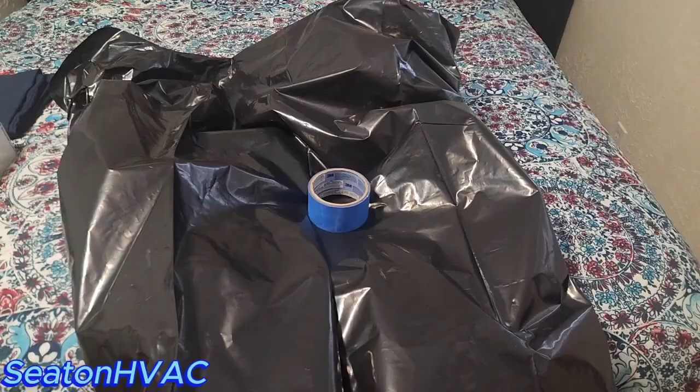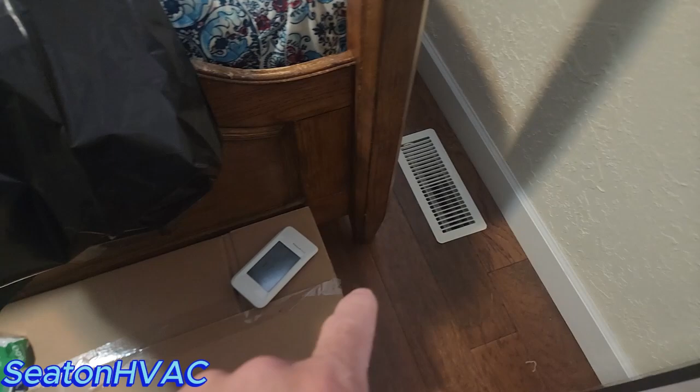Hey guys, I told you I was going to do the plastic bag trick, so here you go. Okay guys, I told you I was going to do this, so I got my 32-gallon bag, I got my tape, and I got my controller so I can turn the fan on. So let's check this out. Let's see how it works.

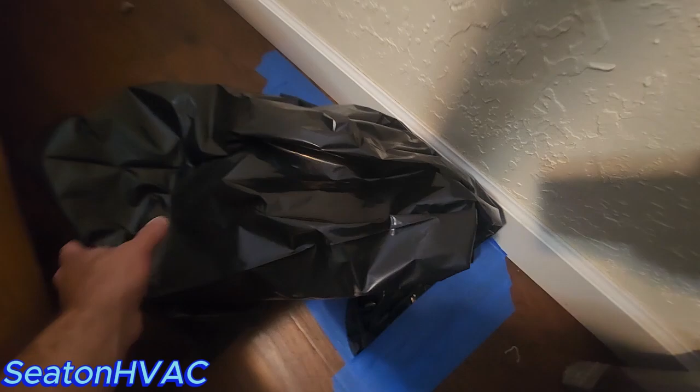Okay guys, so my wife says I'm a little weird, and she's probably right. So what I did was I took my 32-gallon construction cleanup bag, and I went ahead and blue taped him. I got a gap there. I'll fill that in before we do the video. I got the fan off. I'm going to tape this up a little bit better.

So it's a 32-gallon bag. I figure I'm probably losing a gallon because I got a little bit of it taped down. Let's call it 30 gallons just for the sake of this video. And I'm going to get my stopwatch on my phone going, and let's see how fast she fills up.

I wish I had another camera, but my little GoPro kind of sucks. I don't really like it, so I'll have to get the stopwatch off camera, but I'm going to tape this up a little better. I'm going to turn the cooling on to this zone by itself, so it's full speed, and I'm going to time how long it takes to fill this bag up.

I'll be back. Alright guys, I've taped it up better so it's good. Let's do this. I'm just going to count it out. I can watch the timer on my video timer here on the phone. So, you know, I won't get fractions or anything, but let's just get full seconds. Let's see if this works. So I'm going to go ahead. I got my controller here.

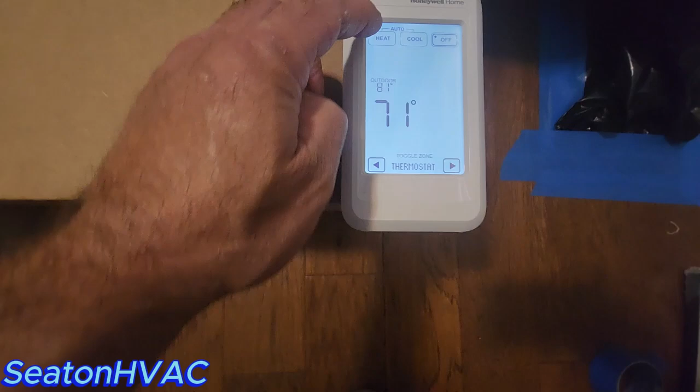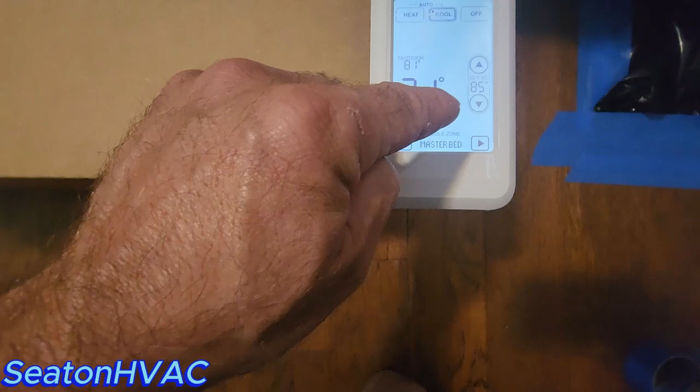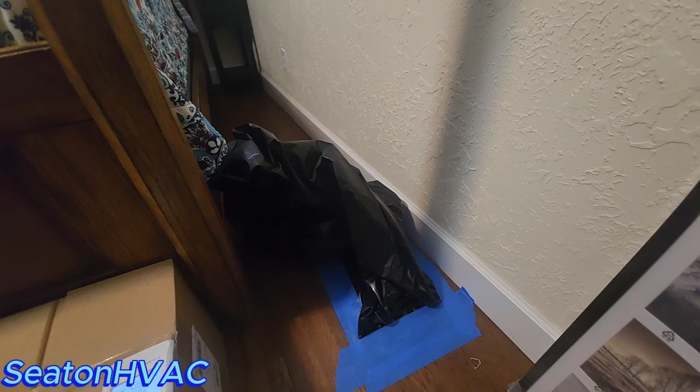Let's see, master bed. Okay, that's this zone. And let's do cool, and let's turn it down, and let's wait for it to come on, and we'll time it. So should be clicking any second. We'll watch the bag fill up. Might have to wait for the delay. Yeah, it's probably going to be a few minute delay because it's got those stupid Vision Pros.

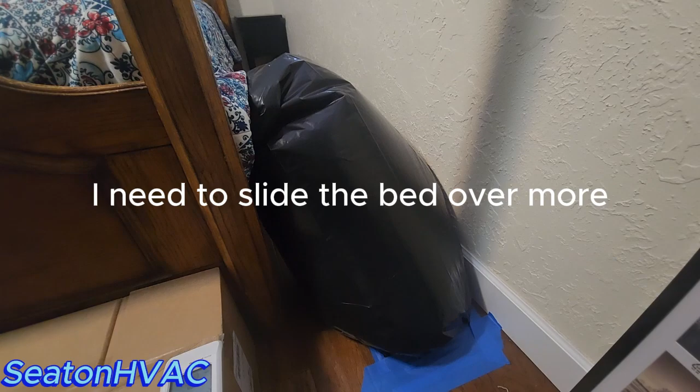I could go down and put it on test mode, but... Alright, hold on. Oh, there it goes. Okay, 1, 2, 3, 4, 5, 6. Okay, it's... wait, 6. Okay guys, we're fully inflated. So what I'm going to do is, let's redo this again. I think it was about 7 or 8 seconds, so let's do this again. This is kind of fun.

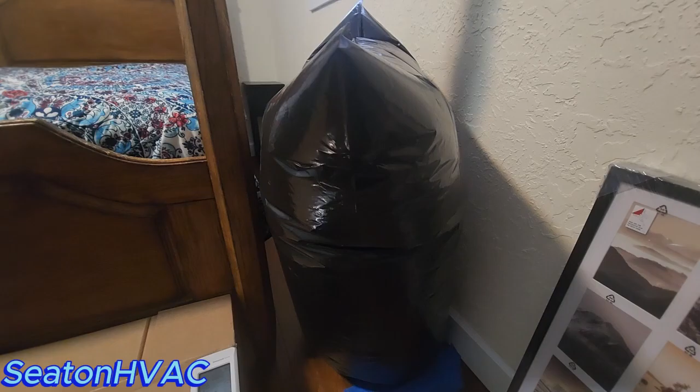Okay guys, we're just waiting for the delays to stop and the system to kick off, and then I'll kick it back on. It's doing its post-purge. But what I'm going to do this time is make sure the bag doesn't get caught on the bed. That's what happened, so it didn't fully inflate. Like, see how it's all pushed up now? And we'll get a real reading on it.

That's kind of cool. It's been probably 25 years since I did this. An old school tech taught me this a long time ago. He didn't want to buy a Flowhood, and it actually worked. We could dial stuff in pretty good, and the customers were happy. So let's wait for it to shut off, wait for the bag to deflate, and we'll do it again.

Okay guys, we're back for this weirdness. So the bag is fully deflated. I let all the air out. I just popped some of the tape and pushed the air out. What I forgot is this is on the zone panel, so it's got that post-purge. I could run out and make it stop, but we're good now. Let's put the cooling back on.

I'm gonna try to pull these flaps up as it goes so it doesn't hit anything, and then we'll count how long it takes the bag to open. So let's do this. Let's go back to cool, and she's on 65, so it'll take her a second to come on, and see what we get. Kind of looks like Yoda right now.

All right, and I'll count. So I'll count where my camera's on as far as seconds, so I can see the counter in front of me. Then we'll do the math. I'll show you the math out on the whiteboard. There we go. 1, 2, 3, 4, 5, 6. Okay. Okay, guys, that was almost 6 seconds on the dot.

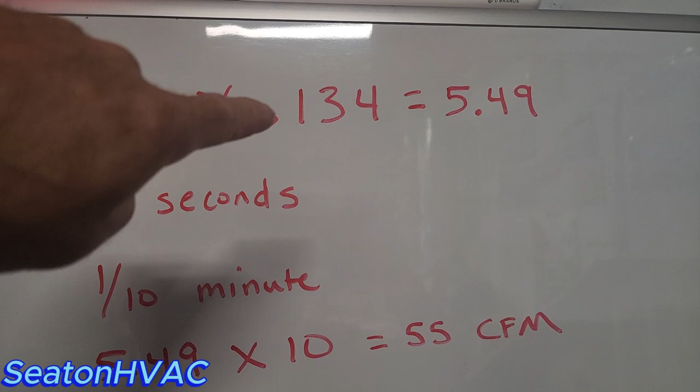All right, guys, we're over to the whiteboard here. So let's do the math here. So I said it wrong. It's not a 32-gallon trash bag. It's a 42-gallon. Let's say we lost a gallon just by taping it down, and maybe that is the full 42. Whatever. This is fun to do. So, 1 gallon equals... sorry, 1 gallon is 0.134 cubic feet.

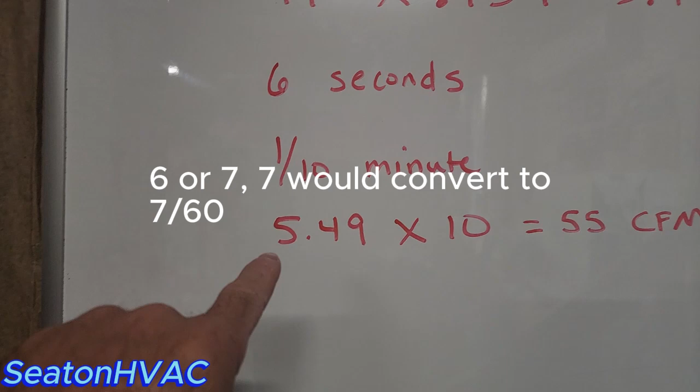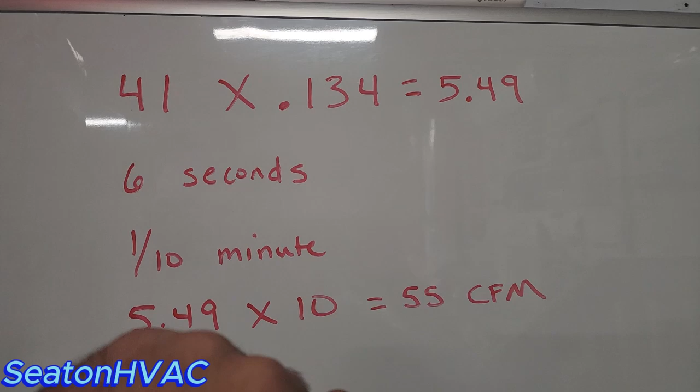Okay. So let's say 41 gallons equals 5.49 cubic feet. We filled that bag up in 6 seconds. That's 1/10 of a minute, okay? So what we're going to do is times that 5.49 times 10, and that gives us our 55 CFM, 54.9 CFM. And that's pretty good. That's about what that room needs. It's a small room. But it's pretty cool.

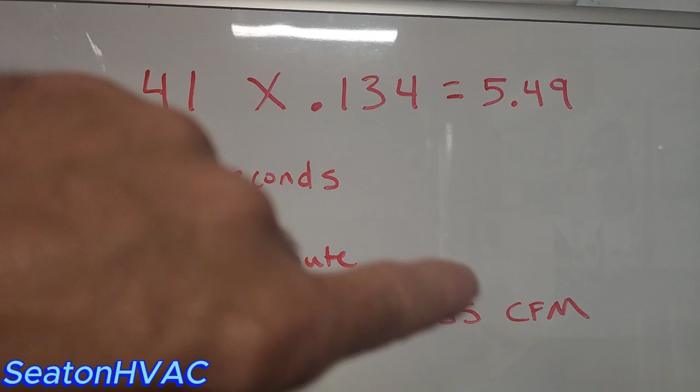If we change this, let's say it filled up the whole bag to 42, we'd be closer to 60, whatever, you know. It's a good way to verify that you're getting airflow to all rooms. So you could take that bag down to all your rooms and see if you're getting even airflow, if the rooms are equally sized. Kind of cool, though, watching that plastic bag blow up on there. So, yeah, if you don't want to buy a Flowhood, buy yourself a Hefty bag and some blue tape and go crazy.